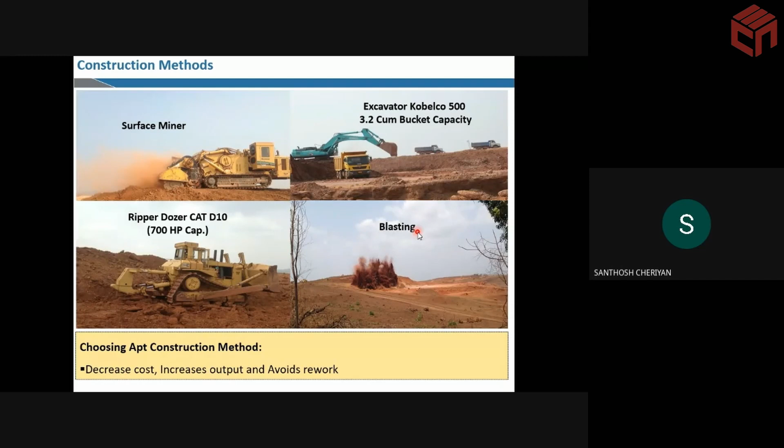I happen to do an airport project with around 2.6 crore cubic meters of excavation - it is as good as a mining project. So we adopted the techniques used in mining, and that's why you are able to see such mining equipment in my project.

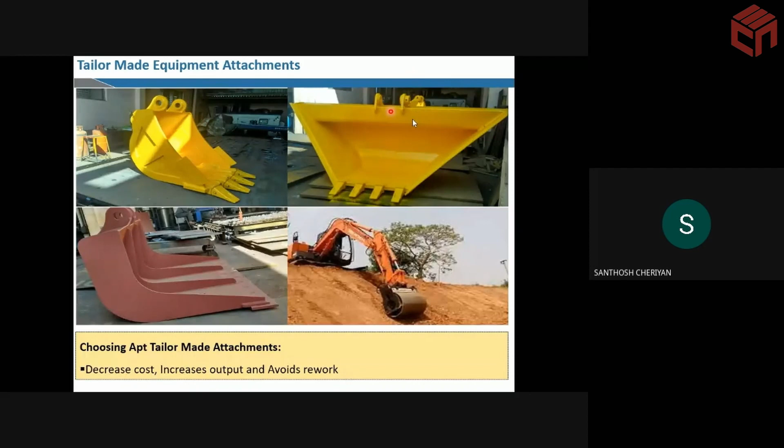These are the various attachments that we use generally for various machineries, like the excavator bucket. These are all excavator buckets, but of different designs as per our requirement, to reduce wastage, increase output, and avoid rework. These are the few simple things we generally adopt. Once it is adopted, your life will be very easy.

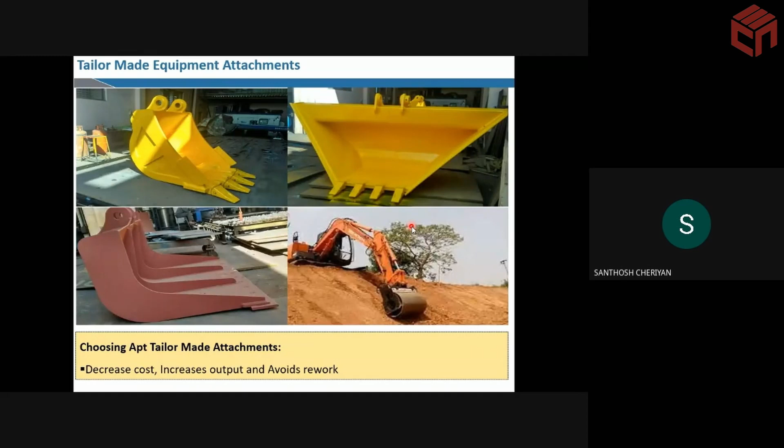And this is the slope compactor. In case of high embankments where the slope needs to be compacted, you use the vibratory soil compactor attachment on the excavator, generally attached to the breaker hydraulic line of the excavator. That's how we optimize or reduce cost with these attachments.

Then we have certain innovative methods that we deploy to reduce the labor intensive nature of the work, especially since skilled manpower has reduced drastically with COVID and other issues. When it comes to the labor part, it's always a challenge to mobilize labor and get the work executed. So we have certain things that can automate the conventional processes, which are largely labor intensive, and make them automated, highly productive, and with less rework.

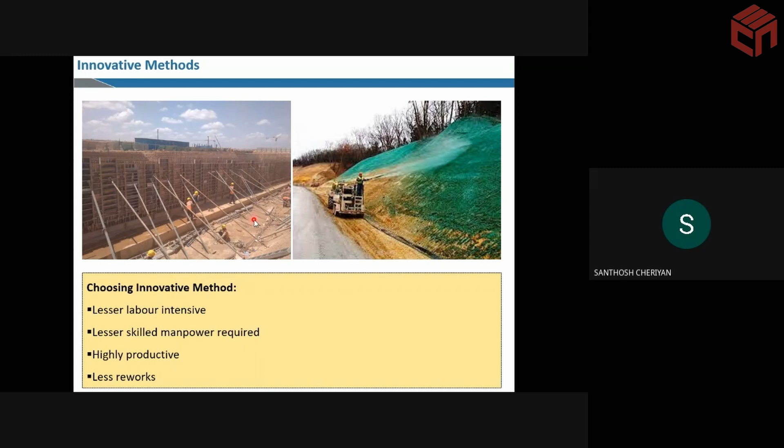Especially if the slope is very steep, you will need a lot of safety harnesses and other things, and a lot of manpower will be required. But this will really make your life simple, with lesser labor required, highly productive work, and less rework. So these are very simple things that need to be done in order to make your life very easy.

It's a very strategic call that you have to take when you go into that position. Being an entrepreneur, being from IIT, you will always be like forthcoming entrepreneurs, and you can propose, suggest, and implement these things wherever you are working.

Now coming to innovative packaging and transport solutions. This is another strategy that we use for reducing cost in the transportation part. Transportation is one of the major parts from a cost point of view, so how you reduce it really matters.

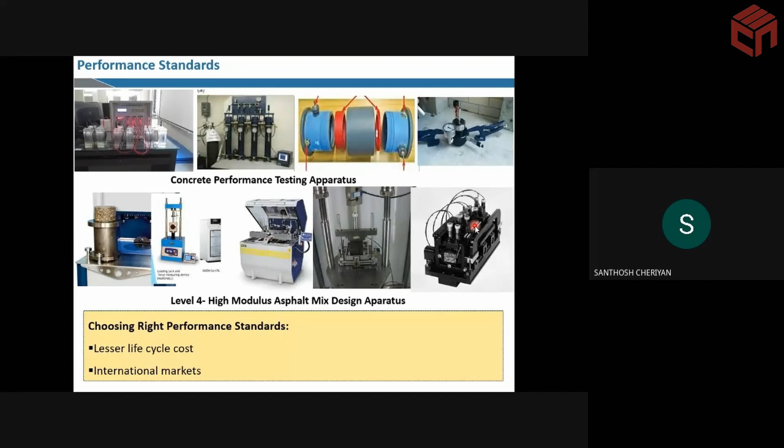It's a lesser life cycle cost, and when you have this type of facilities, you penetrate into international markets. Especially the French people very much like the performance standards. It will be very easy to penetrate such markets when you are having this.

So strategic project management is mainly dealing with strategies, how to deal with the strategies for the project and to reduce the risk, because when we bid, there will be aggressive bidding strategies, especially in the Indian market scenario. The bidding strategies are always very aggressive because the competitors are more, so the risks are high when you start the project. So you have to mitigate the risk.

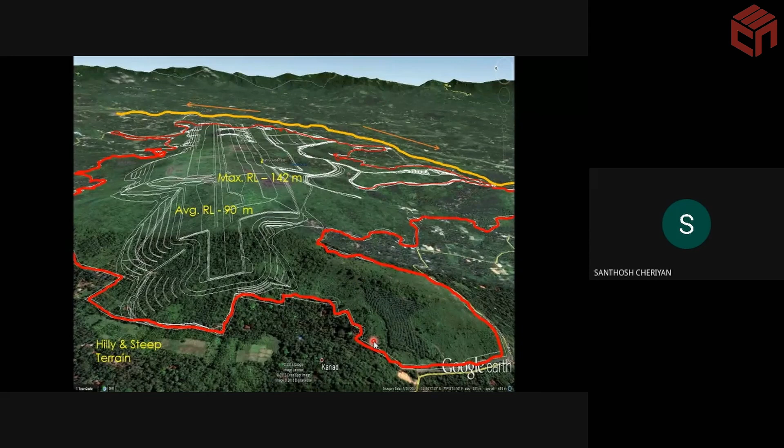There will be conflicting interests between the stakeholders. You have to align the stakeholders to a common objective and get it done. So that is a major thing related with strategic project management. One of the examples I will show is one of the very high earth moving projects. I was telling about 2.6 crore cubic meters of earthwork involved. So it is a tabletop airport.

So here the issue was that you have a trial landing that needs to be done, and things are not very favorable in that location. So you need to do it, but you have to align your goals with other stakeholders to get it done. So you do these things to expedite the work, as well as to have a better cash flow when you get into asphalt works.

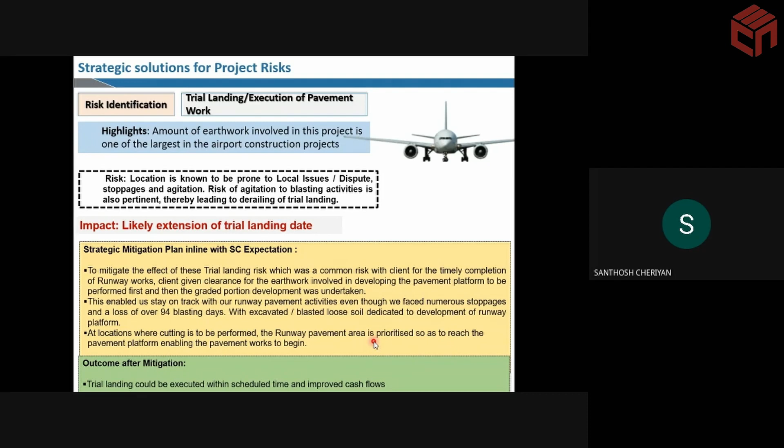The level of effort that you will be putting and the output that you will be getting will be very high in terms of cash flow. So those things need to be aligned. That is one good thing that we used to do as strategic management, to align our goals with the client or other stakeholders, so that everyone goes in line with the expectations. So this is one of the examples.

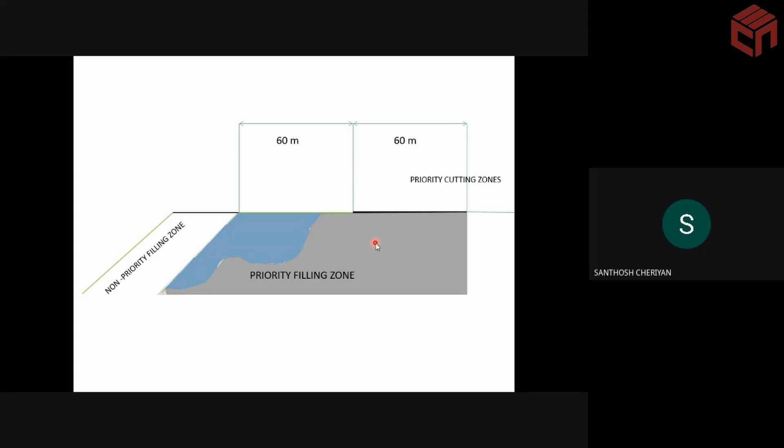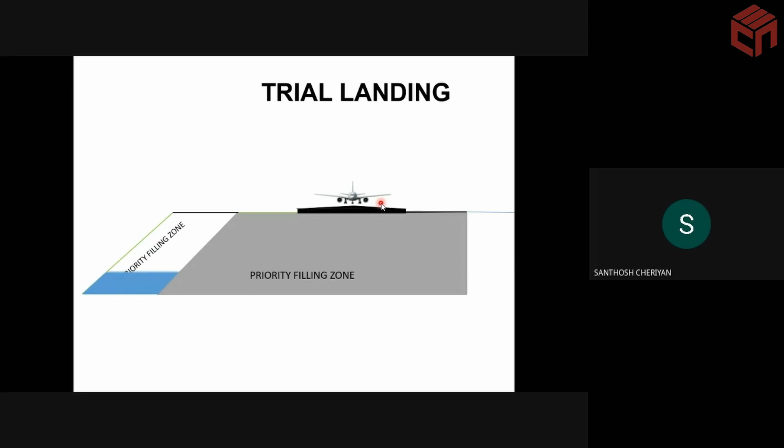We did a priority filling, because you have a very big volume of earthwork that needs to be done. You can't wait for the entire filling platform to be filled and then do the landing. So this is where the trial landing was done, with the filling done in priority zones underneath the runway, and the rest later on. The runway is made based on the safety nature of civilian aircraft.

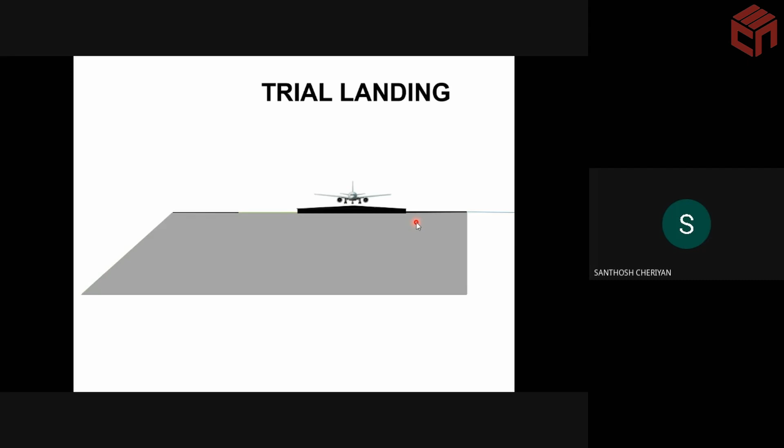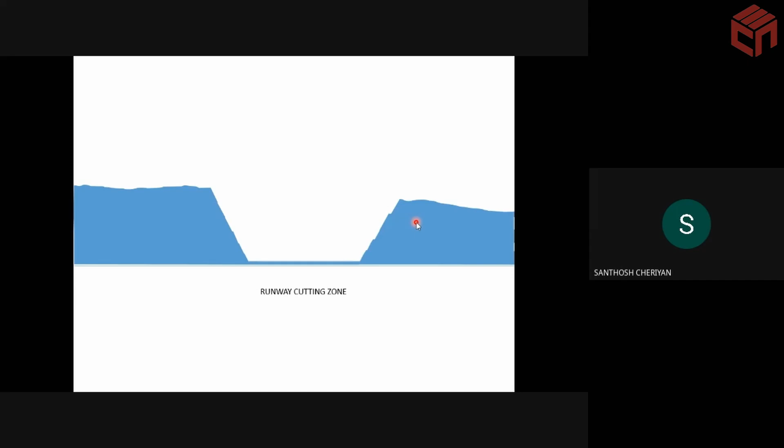So we need this much width of the platform, then only landing can be done. But for the trial landing, we landed a smaller aircraft, and for that, that much platform was not required. That was the concept. This is the runway cutting zone, where a similar strategy was made, and this is how the runway was made and the landing was done. These are unique strategies done at a project level in terms of risk mitigation and aligning your objective with the stakeholders to make it a success.

the soil fill needs to be done with geogrids or ParaLinks. ParaLinks are high capacity geogrids, used in this type of fill. As usual, we have to depend on Maccaferri to get the materials. So we transferred the entire risk to them by giving the entire material part and supervision to them, so that they bear the risk and take responsibility for the entire fill.

So that was the idea, and then we engaged a contractor also to get it done at much more economical rates. That's how we do a risk transfer mechanism to mitigate the risk. That is one of the strategies that we use.